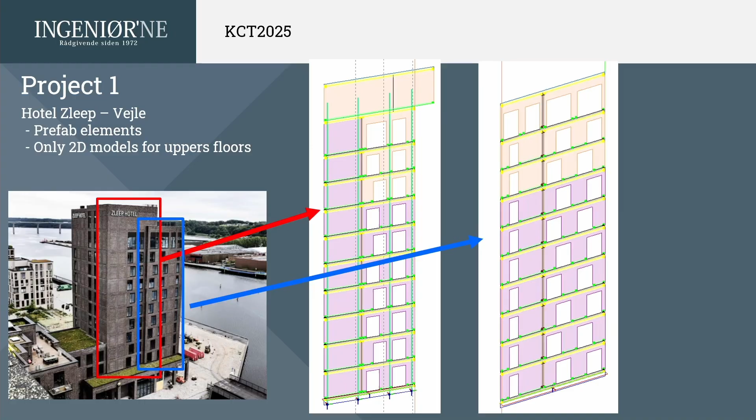The first project I want to talk about is a hotel in the city of Vejle. It's prefab elements, and then we have cast floors down the first 2 floors. I like to split the models up into different simple models. So it's elevations in 2D. For each wall's elevation, I make them for every section, and then all the load reactions we put on the 3D model at the bottom.

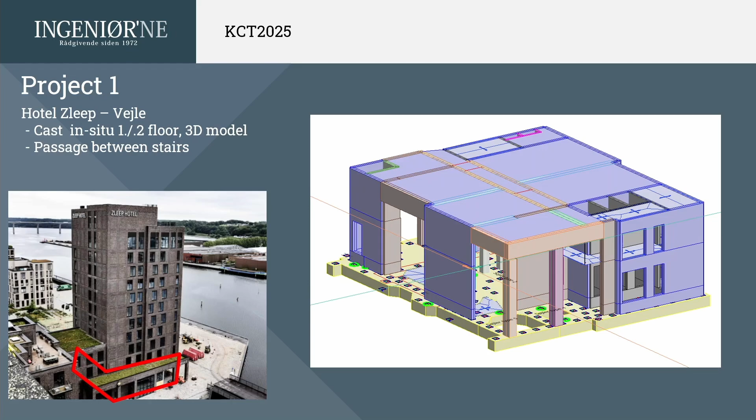And this is 2 stories. As you look here, it's actually 1 high story, and then we have a corridor between the elevators and stairs group and the rest of the building up here. So it's over there.

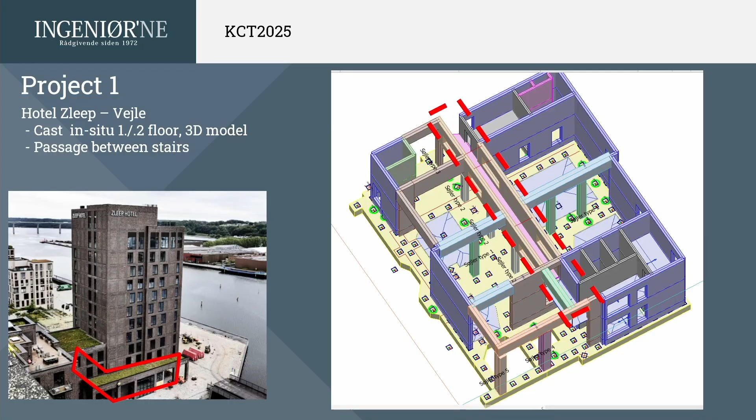But this project was actually designed for another project in the beginning. We built a hotel here, but in the beginning it was designed for apartments. So almost 70% of the piles was in the ground before we started our calculation.

If you look here, this was the original design for this project, but in our design we have the stairs group and elevators on the side, and in the middle of the building we have the restaurant. That's why we have a lot of columns. So all the stabilizing walls were around the building. This building was finished in 2022, the same year the Tour de France was in Denmark.

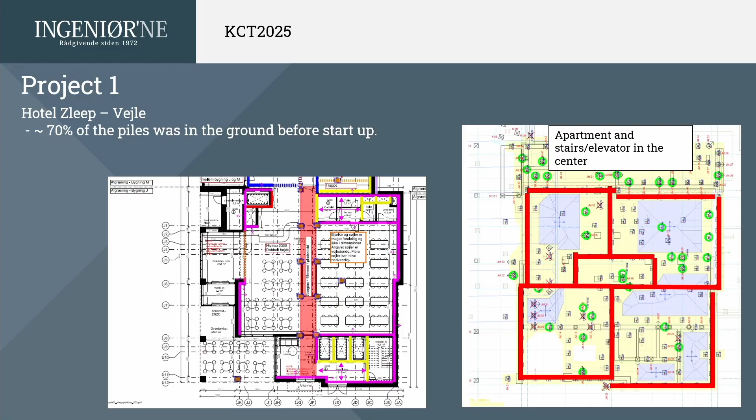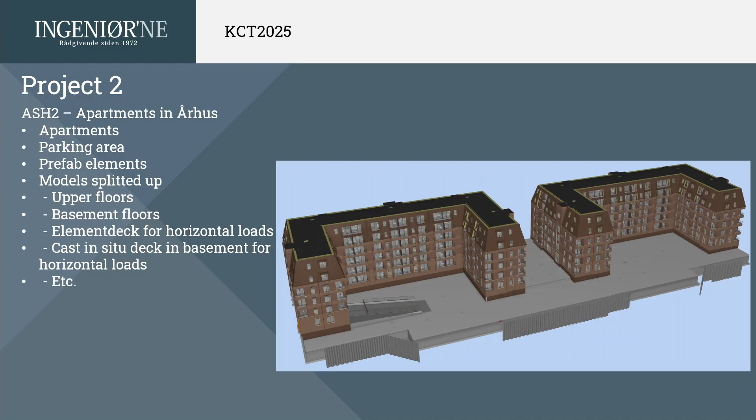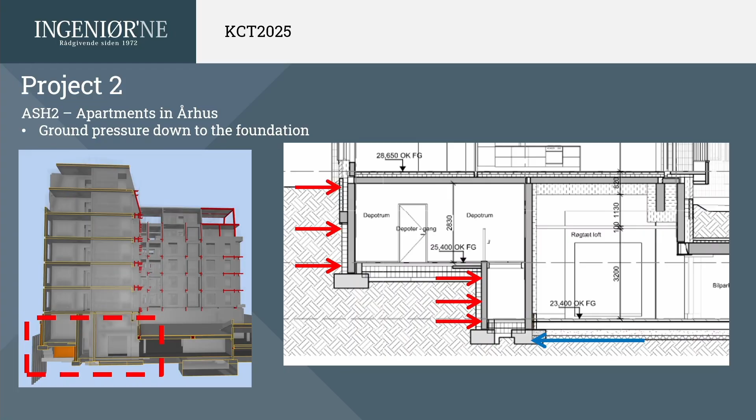The next building is a project I'm working on right now. It's apartments, and it's in Aarhus. It's a prefab elements project, and we split it up into different models. The main thing is that we have earth pressure from the soil in this project, and we don't have a deck that we can push the forces to the other side. So we split it up into different models.

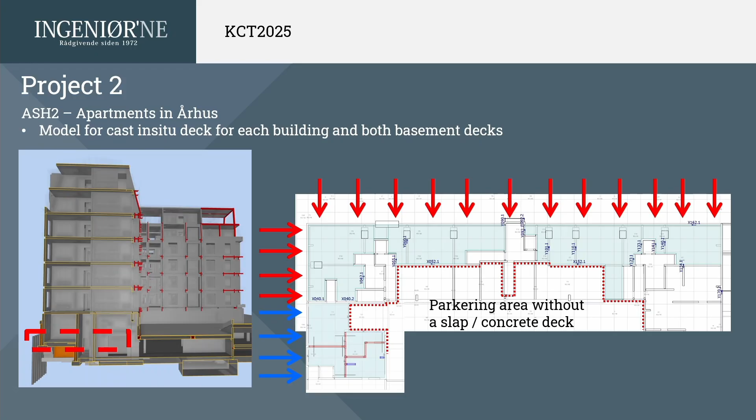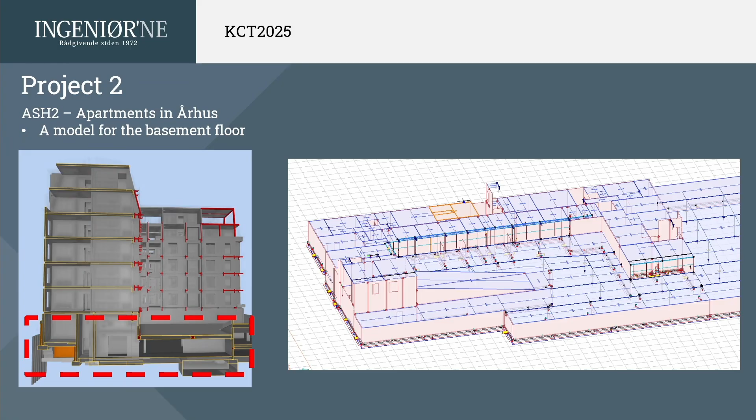Then we check the slab in the basement, and you have a lower basement slab as well. The rest here is no concrete, so we only have a very narrow section where we can transfer the forces to the stabilizing walls. So we build up the upper floors in 3D, but none of the walls are connected to each other. And then all the reactions we put on the basement model.

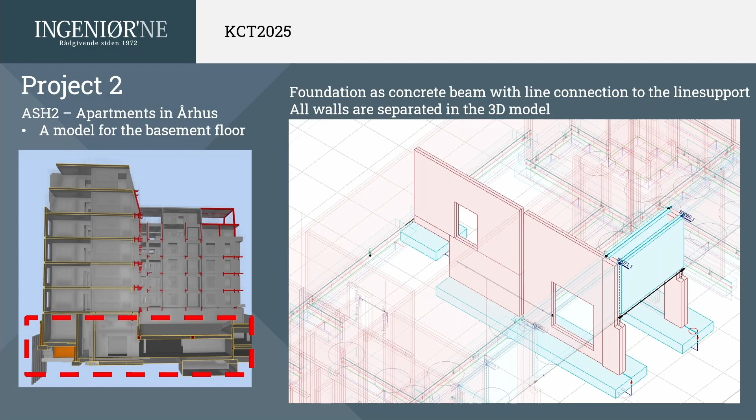If you take a look inside the basement here, we also added the foundation as a beam with line connection, and then we can transfer all the reactions and make the check for sliding and the dimensioning of the foundation as well. And we use prefab BAP to document the elements.

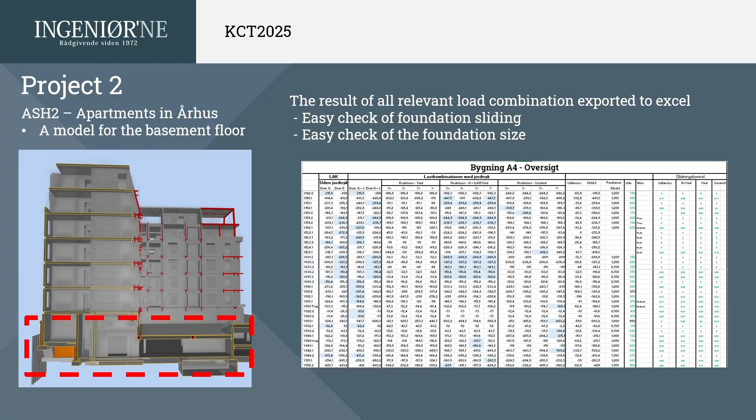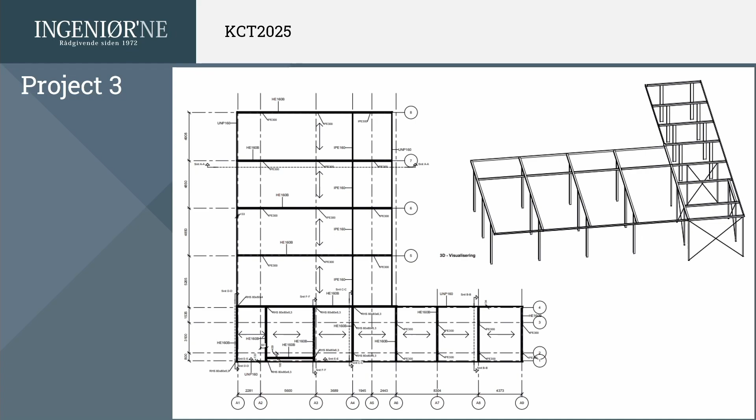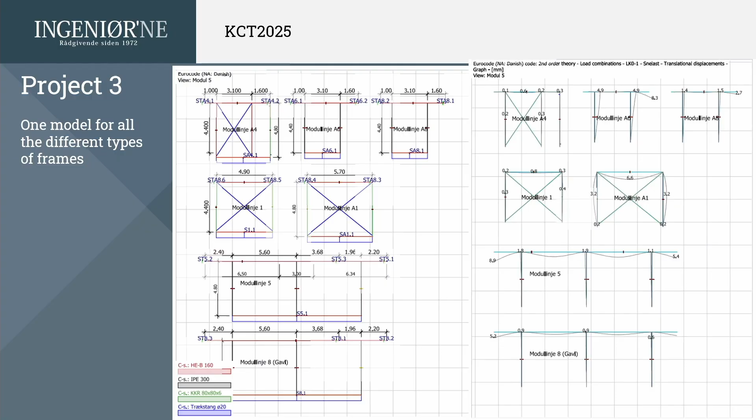The last project is a small project, also in Vejle. I show this because you can do it in 3D, but I always prefer to keep it simple if you can. So I make 7 frames in the same sheet. That way you only need 1 documentation print, not 7 different prints, and you can show the deformation, reactions, and so on.